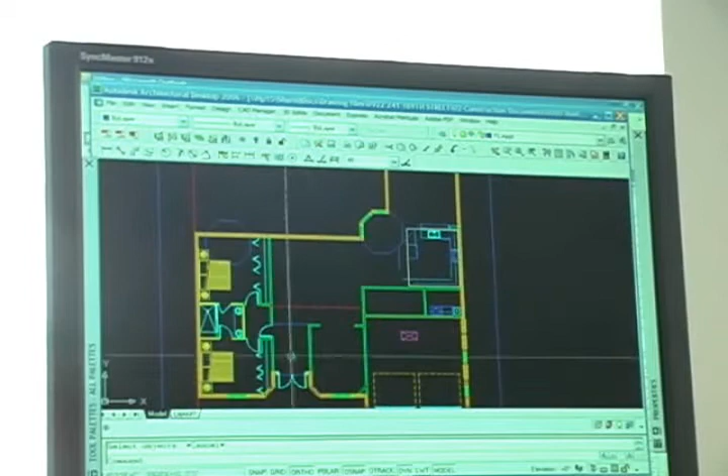Right now it's obviously a two-car garage. This is the dining room area, 2 bedrooms. I probably will change this so that it's a full 2-bath. At present, what I'm doing is trying to get things worked out so that I'll have a laundry, powder room somewhere in here, stairs will be somewhere in here, and this is a living room, dining room, foyer, and family room, kitchen.

Since you saw this last, let's just get rid of this stuff now. We finally got that stair pretty much put in the right place, and we've gotten this little breakfast nook worked out. We did away with the cabana bath.

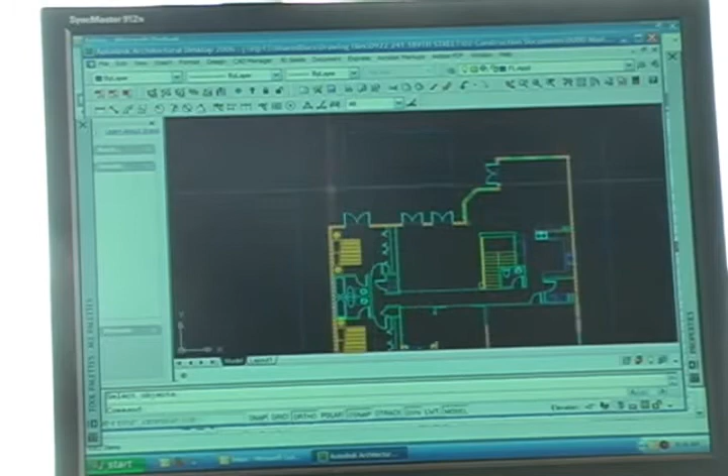Okay, we're now watching some motion capture of me actually designing the house. I'm designing the house on Architectural Desktop 2006. What you're seeing here is just me refining the design.

I'm going to probably put an air handler closet in that laundry room, and then we'll move over to the bigger idea, which is while I've been designing the house, I've been struggling with how to get the dining room and the front bedroom even, so that the front of the house will have an even mass and appearance. And in order to do that, I've had to remove the closets that I originally had in the design to the right of the plan.

And to get those closets back in, I'm going to have to push the back bedroom out, as you can see in this clip here, where I'm mimicking the shape of the breakfast nook, and then I'll push the bedroom down, and that'll allow me to get the walk-in closets and the 2 bathrooms, linen closet and air handling closet between the 2 bedrooms.

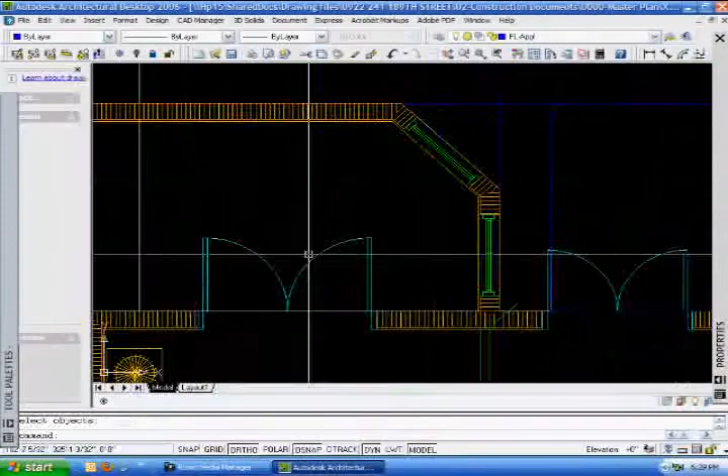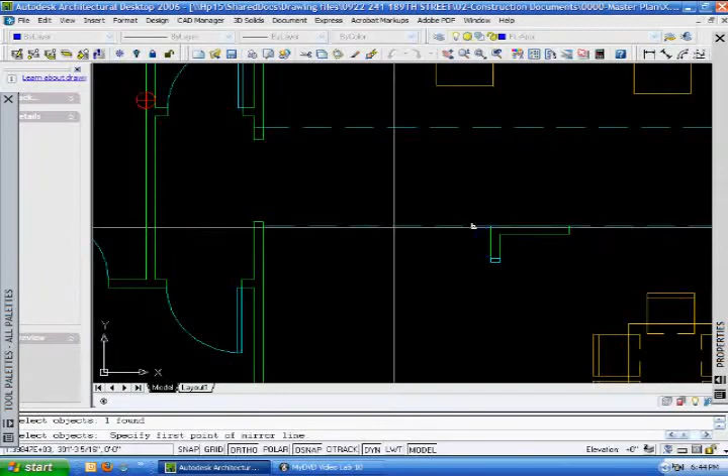Now, one of the things that I would want to mention is, as I said, you're watching this at about 3 times as fast as it happens. If I were to show it at true rate, it would be probably pretty boring to look at. But it's not a linear process when you design the house. As you can see, I'm jumping around, looking at different parts of the house. I see things that need to be fixed, go and make adjustments to them.

For instance, now I'm going to adjust that column and center that up on the back porch there in just a moment. But it is a non-linear process, and it's a non-linear process, and it takes a long time to get things thoroughly worked out. So I wouldn't want anyone to think this is a quick thing by looking at this video.

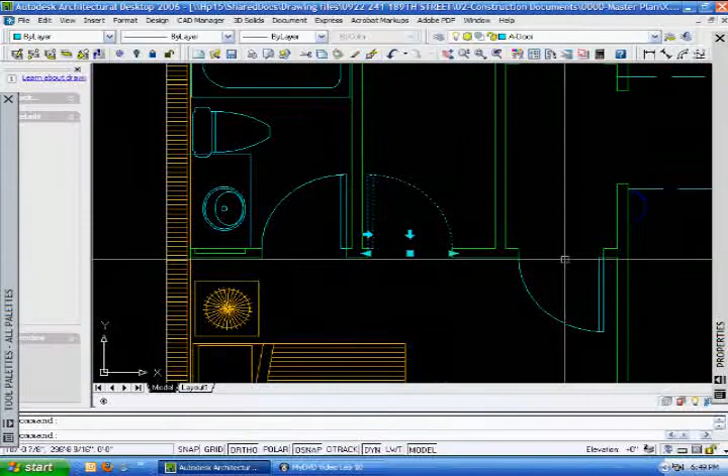Here's just to give you another example of working on the plan. This is in the 2nd floor around the master bath area. One of the things I've worked hard to try to do is...

Since the entrance to the master bedroom sits at the top of the stairs, I've tried to hold the entranceway back from the edge of that stair, give it a sense of arrival. And here you can see I'm refining, actually designing the bathroom. Right now I'm just putting in the shower.

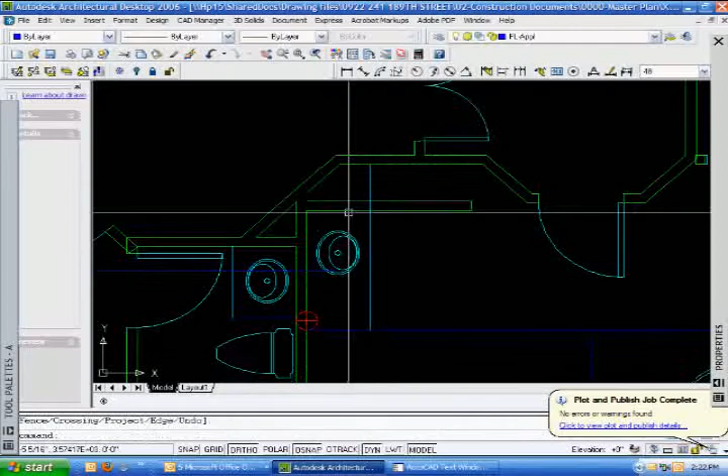And one of the things I've worked on here is to try to find, you'll see that I start to put in a closet that separates the entrance to the master bedroom from the other bedroom that's to the left of it. This is to make that master bedroom feel special. And you can see there in the plan that closet's in there, and that's the final version of that.

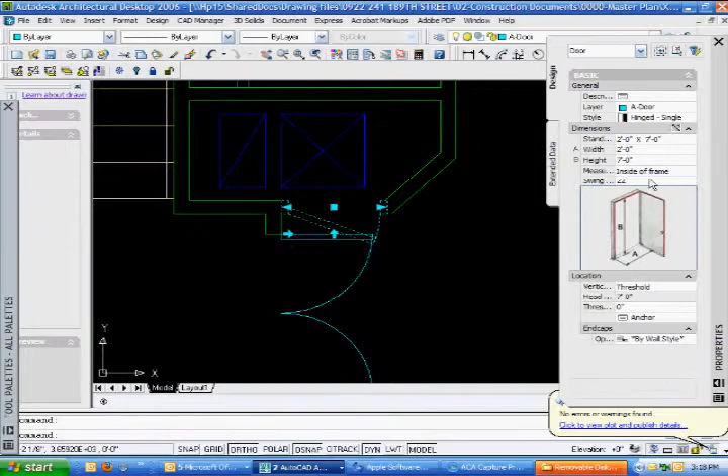Here I am putting in another air handler closet. I've flared those closets out at the end so that the hallway's shorter. Here I am fiddling around with that linen closet again, seeing if I want to make it smaller, but I ultimately decide to put it back as I had it.

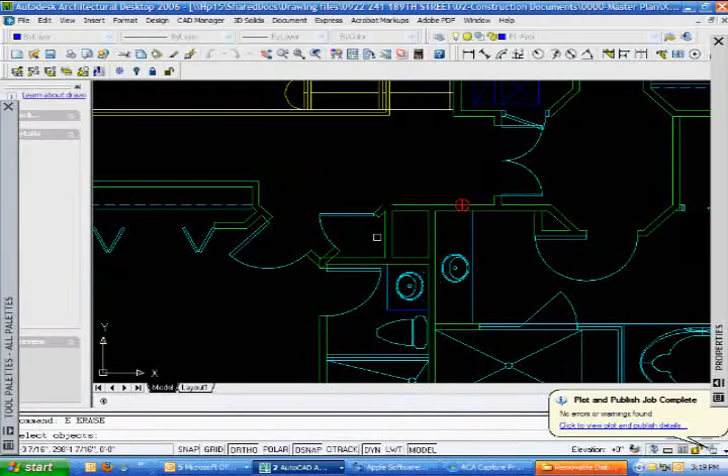And that's now I'm just putting some windows in to show the client. They're just in the general location. When I get to the elevations, I'll refine those further.

This is the final plan here, and this is where we're talking about keeping the front bedroom even with the dining room area, so that that mass stacks upright.

In the front, that's the front porch there, coming into the foyer, dining room on the right, living room, first bedroom, walk-in closet, bathroom, walk-in closet, linen, air handler.

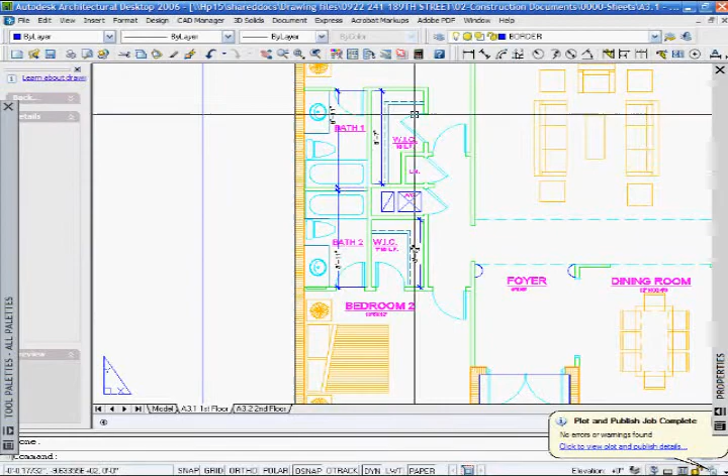The dotted lines indicate the bridge, connecting bridge on the second floor. That stair is open to the living room area, so that'll show nice. Powder room folded under the stair.

Garage, laundry room, you can see I folded back the edge of that air handler closet to get the water heater inside the garage. There's the kitchen with the eating counter, opening onto the great room, which has nice windows out to the pool. There's the breakfast nook, and there's the loggia. Now let's go to the second floor.

We have a balcony that serves those front two bedrooms. Foyer and living room open to below. Those are two-story volumes. As you see, I'm trying to give myself some room there at the top of the stair to that doorway to the master bedroom.

There's that closet we talked about, separating those two doorways. And then once you come in, I wanted to create a sense of arrival, so I've flared out those walls in the area right when you come in.

There's the air handlers, two walk-in closets. Come into the master bath. I've kind of folded a little poche wall there for the door to die against. Shower, tub, sink, toilet room.

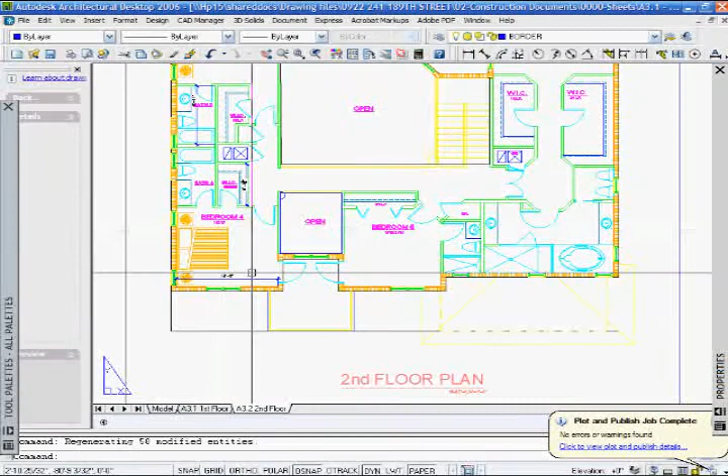The first and second floor plan in this area are pretty much the same, with the exception of where we have those doors that go out onto the front balcony. So that's pretty much the plan. It's 4,500 square feet. I hope you enjoyed watching that.

The next video will be elevation refinements, and we'll be looking at things in 3 dimensions once the client signs off on this plan.